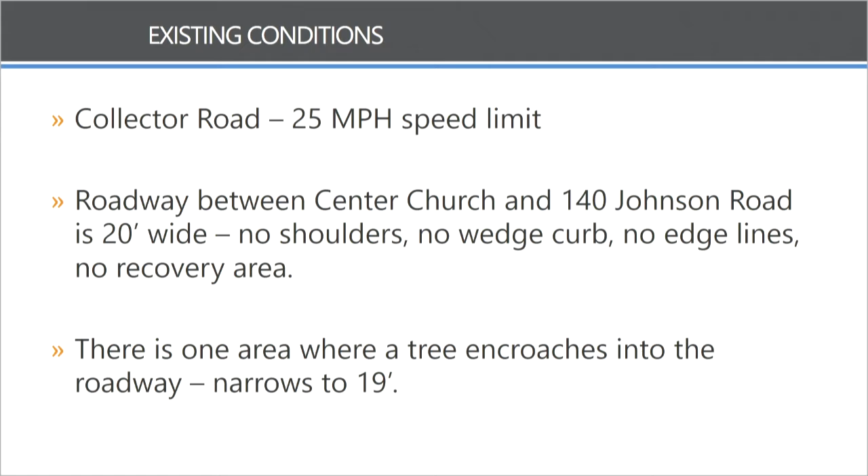Here's what we found with some traffic data we collected recently. Good news is speeds are down from when we did the traffic calming originally. We had a counter up at 114 Johnston Road. The traffic 24-hour count is 2114 vehicles a day, and the 85th percentile speed is 34 miles an hour. Down at 151 Johnston Road, the traffic count is 1532 vehicles per day, and the 85th percentile speed is 35 miles an hour.

As Paul mentioned, there were some crashes, and I was kind of surprised at the number of crashes. This is a 5-year crash history from 2017 to 2021, a total of 15 crashes. There is a cluster in the maps on the next page—I'll show you after we go through these numbers real quick. There is a cluster of those crashes here between Center Church and 140 Johnston Road, and it kind of caught my eye because I wouldn't expect to see that many in that time period in this small of an area.

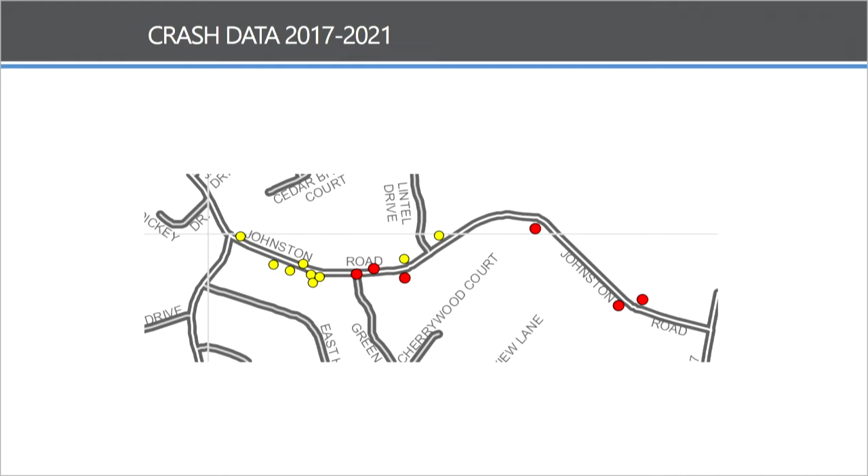You want to go ahead? So talking it over with Mr. Zamitis, we talked about some recommendations. What would we do for something like this? And Mr. Arcuri, with the traffic calming committee, we like to try to take some steps. We don't throw 30 things at once and see what happens.

Right, I thought the best approach here would be to upgrade signing and pavement markings and things like that. So there are signs out there now, there are some curve signs out there. I think the first thing to do is go out and check the reflectivity of those, and if they're even 10 years old or older, probably just replace them. They're probably beyond their useful life.

There are these slow curve pavement marking signs that PennDOT's had a lot of success with. They've had 40 to 50% reductions of crashes using this type of curve pavement marking on the road. Again, it's a pavement marking application that the township could either contract out or do themselves.

Good, Paul. Curve delineation, you can see the flexible delineator post. One thing you notice if you're up there on Johnson Road, a lot of people have their own homemade deflectors or reflectors or things they're sticking up, and some people have highlighted tape taped around some of the trees up there. There's people already doing this kind of on their own. I think it would be best if we went out and had some of the standard highway type delineators put in. Another thing, some street lighting would help coming into some of these curves.

And like I said, there are a few trees that are right up against the road that, if somebody hits them, that's going to be... Are they in the right of way? Yes, trees in the right of way. That's something me and Mr. Zamitis would have to go over, we'd have to see what things are in the right of way and really find those trees.

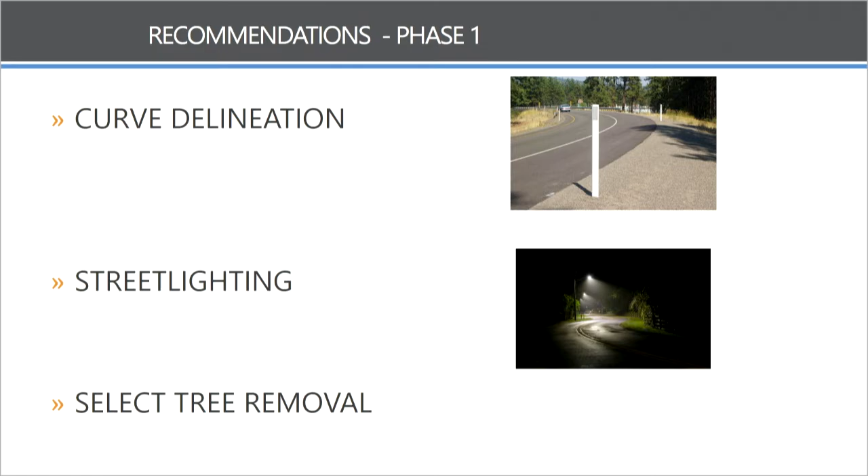There's a couple trees out there that are actually, you see some damage on them. It looks like somebody hit a couple of them. And maybe they're not getting reported to the police because, again, if you brush up against something and you can keep going, these people, they don't stop, they don't report the accident.

So it's not in the database. I would expect there are a number of crashes that we don't know about out there.

So a couple quick questions. The speed variance, 46 down to 34 miles per hour, what do you attribute the difference to? Could it be the time of year, so people were driving slower in the winter because the roads weren't good, and back in '13 it was done during the summer? Why do you think there's such a big difference in speed?

Well, I think we've done a lot with the speed display signs. There's a couple on Center Church further up, and then we have the pair down here on Johnson Road. So I do think they work. I'm surprised they're working that much, but they do work. Just to get some comparison of the numbers, I went out and measured the speed twice in those locations, on two different days.

And those accidents that are reported, do you know what percentage were during the day and what percentage were at night? It's in the data, I don't have that handy, but it's in the data. There were a number of nighttime accidents. Some of them are mailboxes getting hit - you don't know when that happened because the person wakes up, goes out, sees a mailbox knocked down, and doesn't know when it happened.

Thank you. Sure. I have a question for you, Mike. The actual road as it presently exists, is there a white berm line going down the middle, or a line down the middle or anything like that? Because I remember there was some road, I can't recall where, but this was several years ago - I thought it was up one of those roads.

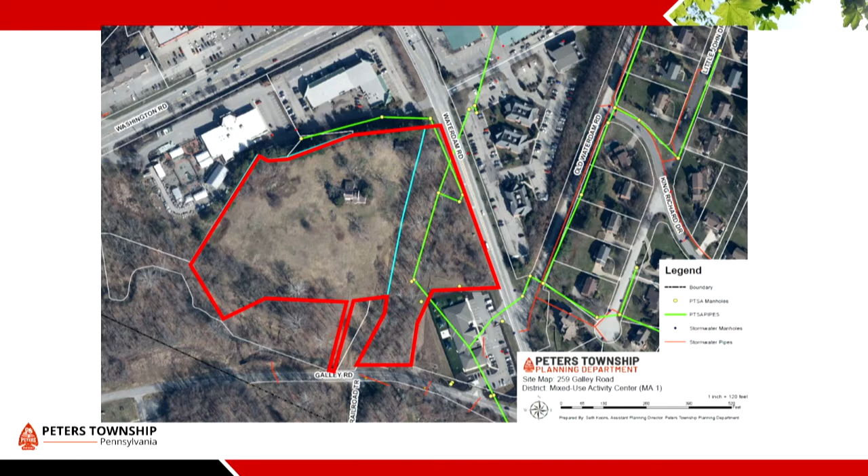It's for a proposed multifamily residential development on property located at 259 Galley Road, including a request for relief from certain township regulations. Let me begin with some background. What's being proposed on a 10-acre site bordered by Water Dam and Galley Road is a multifamily development. Because the proposed development requires changes to the zoning ordinance as well as variances, the developers asked for the opportunity to address the Planning Commission, which they've already done, and to address council prior to finalizing acquisition of the site.

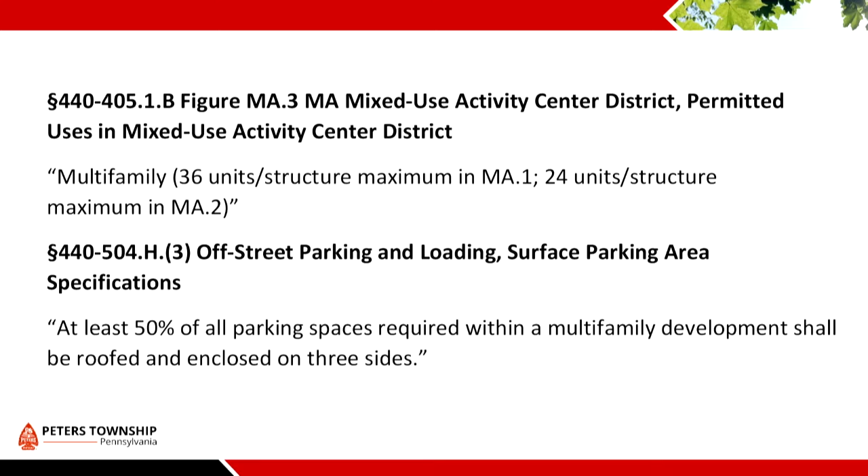So what's being requested is that the township consider changes to its zoning ordinance, removing the restriction that multifamily dwellings in this zoning district be limited to 36 units, and eliminate the requirement for covered off-street parking, which is actually a requirement in all zoning districts that have multifamily dwellings.

So what they're proposing is to be able to build something that's a much more substantial structure than that, and they can show you what they're proposing for the site.

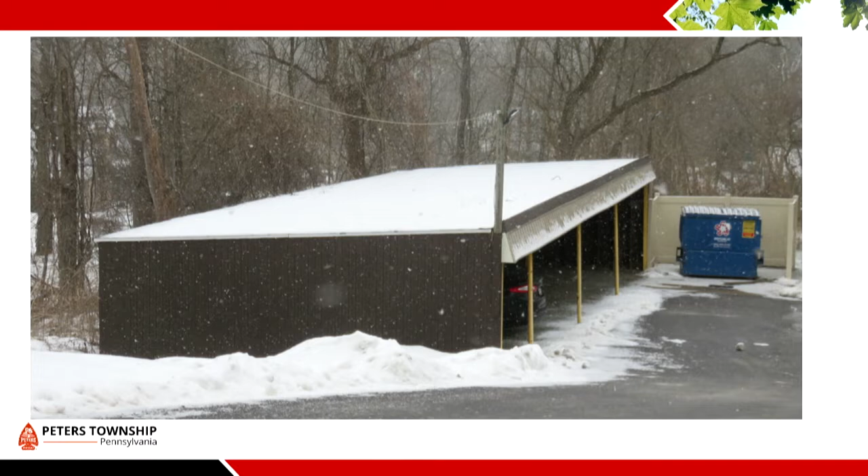The other thing is we don't have a lot of rental properties, but the few we do have require covered parking. These are examples of what that parking looks like, and this is an area where I think anybody who looks at it doesn't necessarily see it as an attractive amenity for a multifamily dwelling, except for the fact that in the wintertime your car is out of the weather.

The other thing they're requesting are 2 variances. In this zoning district, as is the case in the town center, there's a requirement that buildings actually be pulled towards the road, and the idea is to take all the parking and place it into the interior of the site.

The second part of this is that, just as there is in this zoning district, there's a requirement that if you go up to 4 stories, there be setbacks on upper elevations of the building.

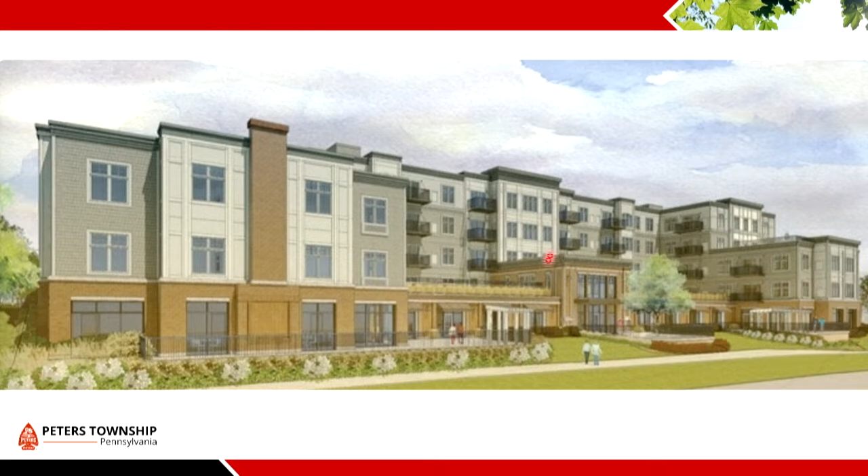So this is an architectural rendering of what the Waters looks like. When it went up to 4 stories, you had to step this section of the building back even further from the road. One of their points is that if you're granted this variance and this building now sits at least 100 feet back off the road, does it make sense to have the 4th story being set back?

That's kind of bootstrapping, Mr. Lauer. Yeah, well, the thing is, and this is beauty's in the eye of the beholder, 100 feet isn't that far off.

So how far is the Waters building off of Valleybrook Road? Maybe 30? 25, yeah. And so what I would argue is if you go across the street to Brewster's and look up at the building, now you're 100 feet away, it's still an imposing structure.

But I think the other thing this whole requirement was attempting to get to was to have buildings that have architectural relief. So if they were granted a variance for the site, I think what we'd want to see is a structure that provides architectural relief. These are renderings they've provided, and in my mind that's more than just a box. So I think you're accomplishing that same goal.

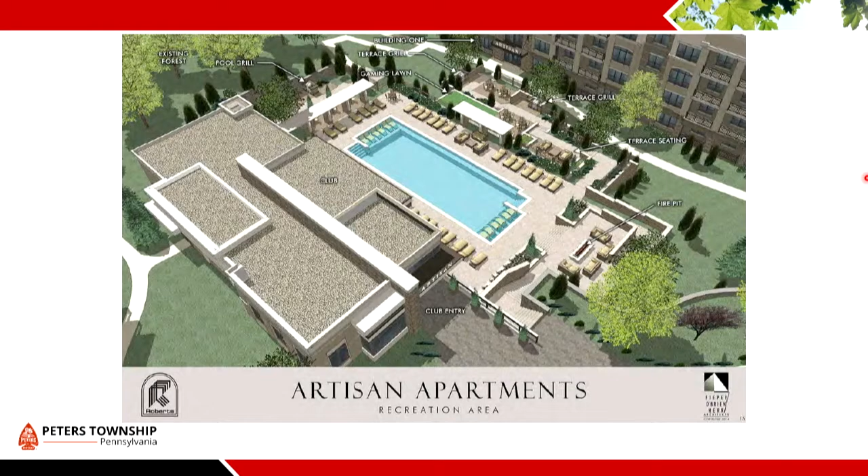I would add that we really want to deliver best-in-class development here. Looking around at contemporary Class A projects, we don't feel that we can provide the same level of amenities and quality of the end product. If we were restricted to that 36-unit max, it's really going to take away from the value, the quality, and the desirability of the project.

What do you envision these units renting for on a monthly basis? We have a pretty balanced mix of 1 and 2 bedroom units, with a smaller percentage of 3-bedroom units included. The smallest units being in the $1,200 range, with the largest units being over $2,000 a month. That's really all dictated by the market.

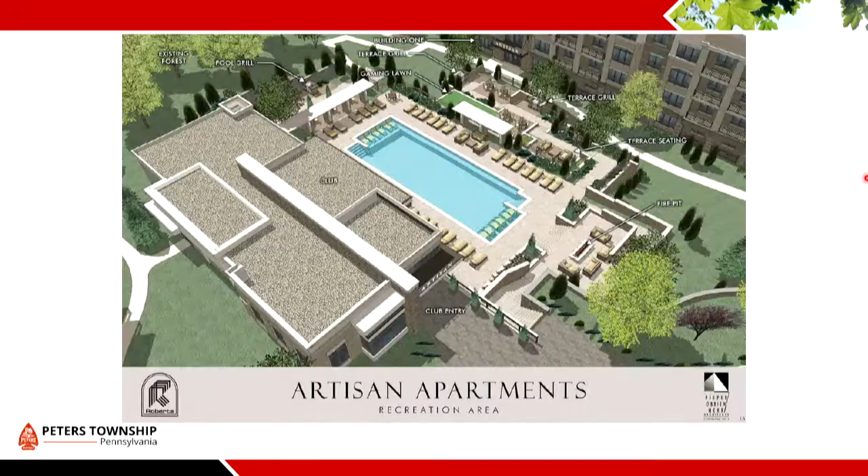I saw a pool - is there other amenities as well? Yes, so we have planned a fitness center, a tenant lounge, a dog park, the courtyard pool, a grilling station, and a barbecue area.

And this isn't the... we would plan to have smaller business centers to support remote working. These are developments that they have done elsewhere, which they have represented to us, that kind of reflect the level of the product they're trying to do.

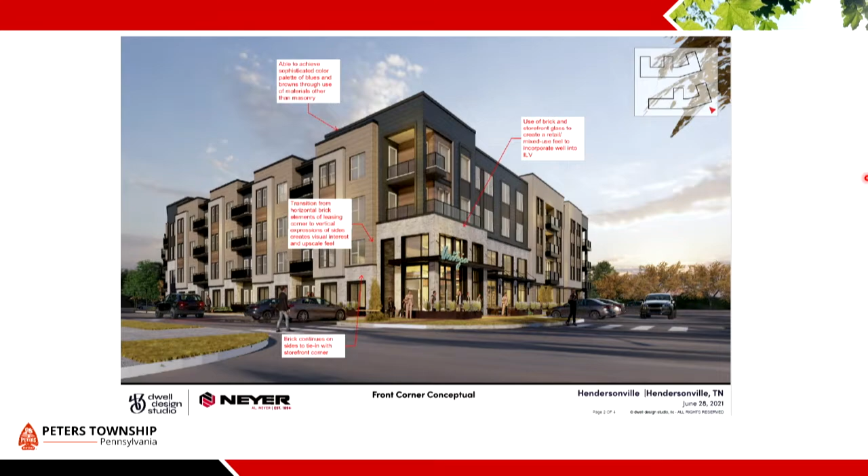Well, this is definitely a type of housing we don't have in the township, and I've always been a fan of housing diversity. I'm certainly more excited about this than the idea of putting a hotel there. I think there was one other plan that came in once - they wanted to put an office park in there, or office condos or something like that. I think it's a great use, but that's just my opinion.

One thing for sure, there is very, very limited rental opportunities in Peters Township. From a greater market perspective, we continue to see increasing demand for quality multifamily housing, and there's very low supply, especially in Peters Township. Reviewing the current housing stock and the comprehensive plan, that was identified as a guiding principle to increase housing diversity, and we're excited about this.

We think this has a ton of potential, not just from a site standpoint, but in activating that corridor at the intersection of Waterdam and Route 19. We really feel like this is going to add in a very positive way to the housing inventory in Peters and help draw in a wider range of demographics, from younger professionals who may have went away to school and want to come back into the township but don't have an option, to retirees or empty nesters looking to downsize. I think this fills a gap that really doesn't currently exist.

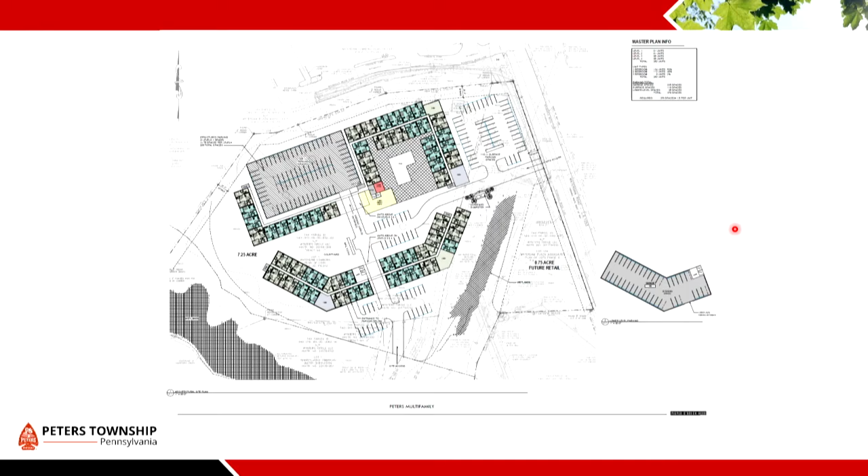Well, my first reactions are comments you probably aren't going to like. I think it's too much for the size of the parcel. It may be distorted based on the images of the developments you're using to show the type of structure, but to me it's trying to put too much on too little a lot.

My other comment is we don't necessarily have agreement as to what 4 stories is versus basement areas, and the fact that we let a building get built that had 5 floors to it - that will not happen under my watch again. But I don't think there's any question anymore because of the changes that were done to the ordinance, and the maximum height is established.

The other thing about this is that's different than this property over here. That property is relatively flat, so you don't have this large grade that causes, on the waters, the park coming down to Valleybrook Road, to have in essence 5 floors. It's a sense of mass of the elements that just visually seems to dominate.

So when you say that, do you mean confined to the site, like visibility outside of the site? Are you concerned that from the perimeter of it, it would be visible?

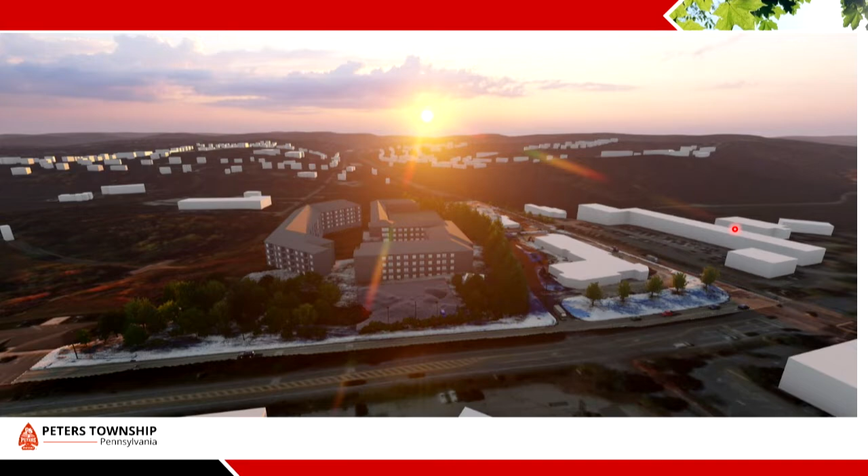Yeah. So if you want to pull that video up, you could probably skip the first 20 seconds. We did a quick 3D modeling - we flew a drone around the topography, picked it all up, and modeled the vegetation as best we could based off the species we know are in there. We're doing a drive-by to see what this site would look like if you were to plop this in place. As far as grading is concerned, we haven't done a final grading plan yet, so we approximated based off the top of existing grade.

Essentially, when we go to balance the site, the building's going to have to come down a little bit. So this is kind of a worst case scenario.

Is there a play button? Yeah, that's what I'm looking for. There we go.

What road am I supposed to be on? You're on Route 19, coming down, going north. You're going to make a right-hand turn shortly onto Waterdam Road.

And the only reason we're leaving the vehicles in there is because when we droned it, you can actually see the vehicles and drop them in so you can see that you're driving at a vehicle's height.

Right now we're making the turn. You'll see that's the Ace Hardware. We're going to be making it, just to kind of see visibility. So you should be able to see the building here, but with the existing evergreens, it provides pretty good screening for what the site's actually going to see.

We're coming up on the secondary entrance, the back entrance to the loading docks for Ace Hardware. This little portion, if you could pause - is there a pause? Okay, great, perfect. So this would basically be the limits of what our proposed screening buffer would be.

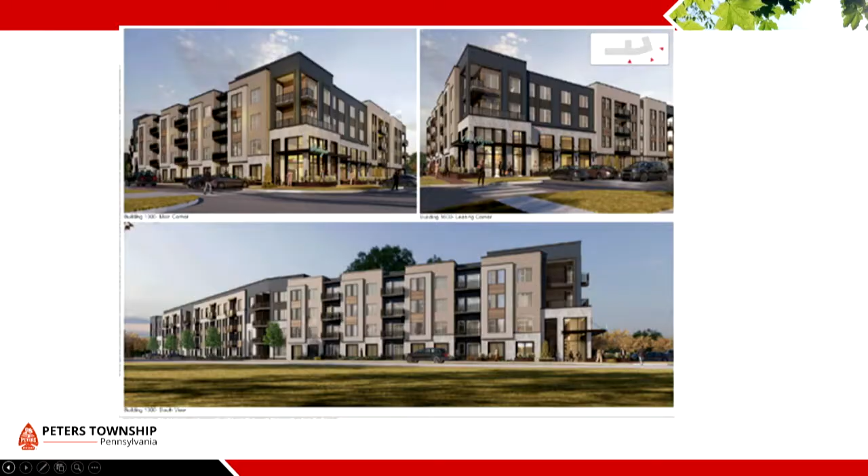So, were there other portions that you still needed to go to the zoning board with beyond what you're asking relief for council? Yes, there'll be a variance or two, possibly. I think it was the last two items we discussed. Yeah, so the 36 unit and the shelter parking are the two zoning amendments. These 4-story step back and then maximum setback that we talked about are the only other non-conforming items. Have you decided from a time standpoint, because if you don't get that relief, do you even have to go through this process with this board and amend our ordinance?

If you go there first? Right. In order of priority, they're all important, but the 36 unit maximum really would make this a development that we wouldn't be interested in. And so we really would like to know where we stand with that sooner rather than later, before we advance our pre-development and pre-construction activities and advanced design.

Yeah, I get that. I'm just wondering from a timing standpoint, you could probably get before zoning faster than this board will take action to repeal an ordinance and change it with the public hearings we'd have to have, don't you think? I think so. Yeah, we could talk about the timing of all that. I think to this point, we wanted to solicit the input of the Planning Commission and Council, see where we stand, and we do think we need to map out next steps. Yeah, that's your prerogative as to how you proceed. I just throw that out there because if you ultimately would fail at that board and we change the ordinance for no reason.

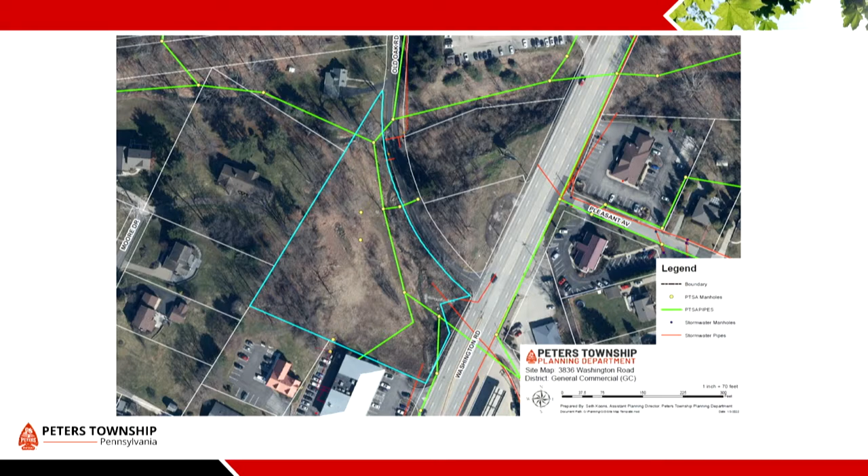It was the same parcel, and at that time council tabled this and said he needed to go back and have a traffic study done, particularly regarding the impact of this development through cut-through traffic that might come down onto Old Oak. That's been done, and I think everybody's convinced that's not going to be a problem—that people aren't going to use this somehow to bypass the traffic light at the crossroads.

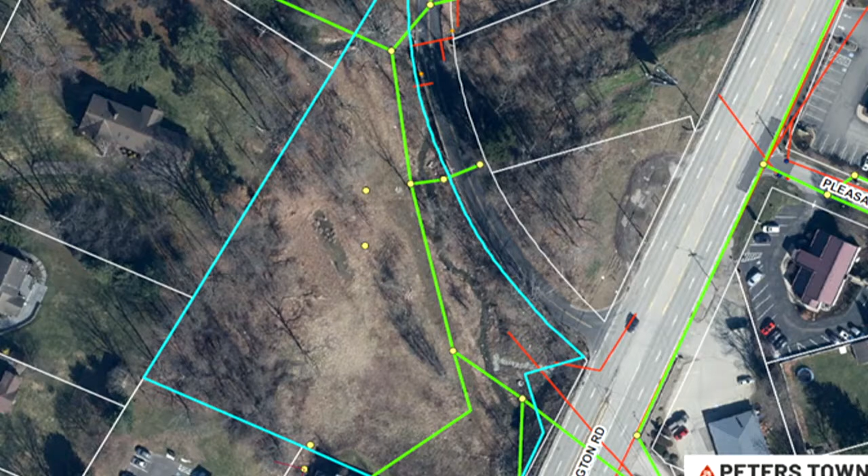He's back asking the same request for consideration of a wall that exceeds the height stipulated in our ordinance. Our ordinance requires walls be only 6 feet tall, then you can step them back 3 feet and go up 6 feet again. You can't do that on this property because of all the topographic challenges—there's a creek at the bottom, there's a floodway, it's a very tight piece of property. So at maximum height, the wall being proposed is 23 feet.

I said this back then—I didn't have a problem with it because I don't see how else you're going to develop this parcel, quite honestly. The other alternative is we leave it empty like the parcel next door and someone sticks a billboard on it.

So is it the parcel to the left? Like if you're going up 19 and make that left-hand turn, is that where the billboard is? Right next to the billboard, across Old Oak from it. No, look at what Chipotle and MedExpress are—the next parcel over to the right, before you get to Old Oak Road. Before Volkswagen? Yeah, you can do something there. Hypothetically, a wall, yes. Wow. Do we know what they're planning to do there? That's what the wall is for. I'd assume it's going to be something like what's already up there.

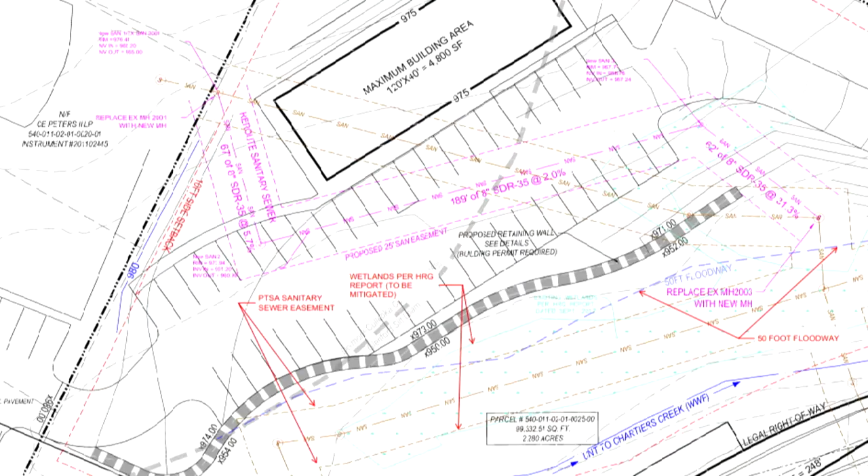So the only time you're actually going to be staring at a 23-foot wall is if you're coming in off of Old Oak as you're climbing up from 19. You're really not even going to see it from 19, quite honestly, because it's going to be pretty much mostly below road level. So you're not proposing to build it up, you're going to drop down and then be down, okay. Correct.

But again, anybody driving up Old Oak is going to see this wall. How far is that from the residential property right back in there? Is it far enough away? There's a stream in between, if you could pan out just a tad.

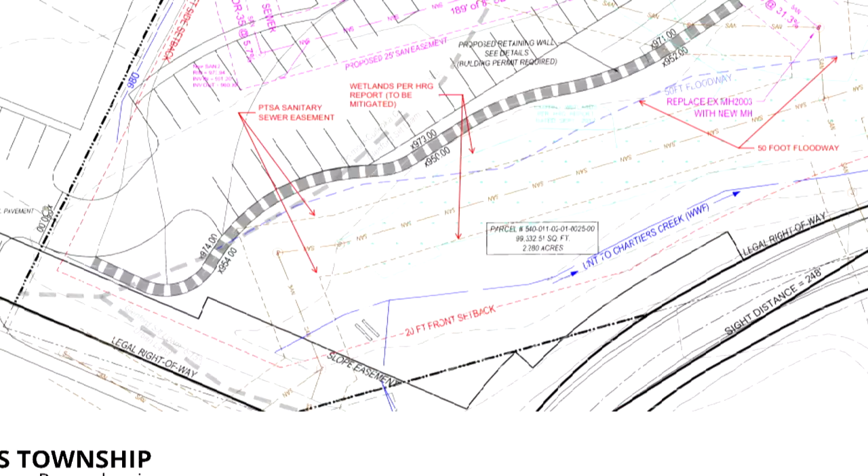Use the other map. There's a stream to the extreme right, where you see the marker, there's a house there across the stream.

Yes, and wasn't that the individual who showed up at the planning commission? Well, it didn't actually show up at the meeting, they sent an email in. That was considered the plan.

So 19 down at the bottom, right? Okay, yeah, we're not sure if he puts this in, he'll be able to connect to the adjoining shopping center.

There is a cross-access joint agreement between property owners to shared driveway access. And I would point out to you that our ordinance requires that all commercial properties along Route 19 interconnect so that people can get out of traffic.

Is there going to be direct access to Old Oak from this parcel? Yes, correct. Do you envision any problems with that? There was a problem with that, the way we had shown it two years ago.

Working with Mr. Mudry, we've gotten the sight distance that was required, because that's a weird curve there. Yes, we shot the sight distance, we had to trim branches. So we ended up having to shift the entrance down about 50 feet from where it used to be. So what you're seeing now complies with the traffic requirements.

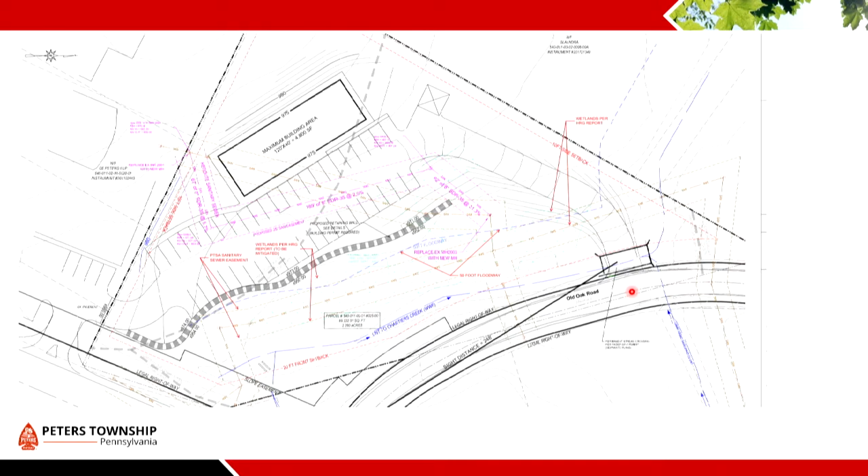Mark, one of the concerns - I'm not in favor of the higher wall. I don't envision too many people coming up West McMurray Road making a right, because you can just go out. You're going to cause problems for Med Express. Maybe that's where that marijuana dispensary can go.

What's that? That's my place. Well, what I wanted to say was, I heard that.

I've been opposed to higher walls throughout my term here on council, and the caution I'm going to have, because I'm sensing that this development might take place, is that we would not allow the building to be constructed immediately behind the wall, to avoid the foundation problems that existed down in Little Washington.

That's correct. The way they're laying this site out, the building itself would be on virgin ground. They cut way in the back corner of it. The building is on virgin ground, and it doesn't get to a fill condition until you get out close to the wall.

But that would have to be a condition that I think would be implicit in whatever action we take. Oh, you could make that a condition. Yes. In fact, that would make sense, if you're concerned about that - you would want to include that in the conditions.

So, what was your comment, Mr. Lewis? Well, that the siting of the building would have to be on native ground or virgin ground, as Mark said. Okay, I'm going to make a motion that we approve the request for the departure of regulations regarding the wall height for this property, and make it a condition of any further development that any building and parking area be built on virgin ground.

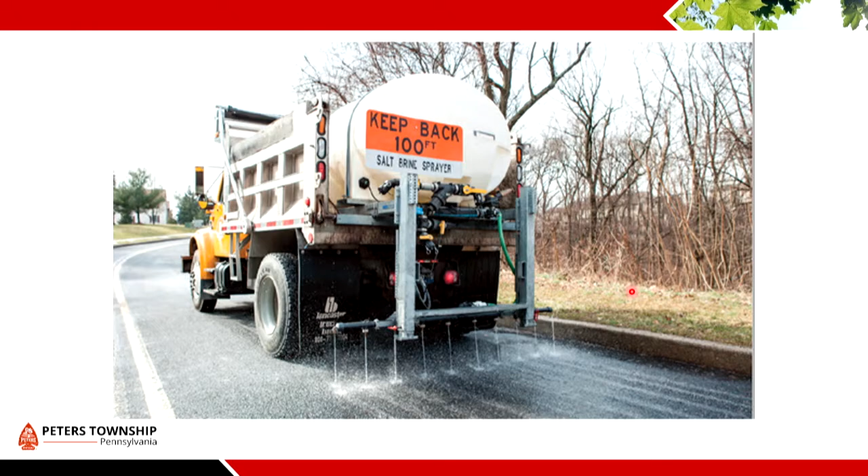Item D, award of a bid to purchase 2 truck-mounted brine dispensing systems. The 2022 budget includes an appropriation of $60,000 to acquire 2 truck-mounted brine dispensing systems. These are used to treat roads in the winter to mitigate icy conditions. One will replace an existing truck-mounted system acquired in 2007. The second is an additional unit to increase our capacity. These are being purchased under the COSTARS Cooperative Purchasing Program, and Stephenson Equipment has provided a quote of $28,077 per system. If we order these, we may have them in time for next winter.

It's within budget, correct? Yes, it is. I'll make a motion that we purchase the brine dispensing systems. Second. Okay, moved and seconded. Any other comments from council? I'd only like to say that I've been more than satisfied with the effort of what that accomplishes. I like it when I come out and I see it's already been sprayed on the night before. All right, all those in favor, please say aye. Aye. Opposed? Okay, carries 7-0.

Item E, resolution electing the standard allowance for revenue loss as provided for under the final rule governing the Coronavirus State and Local Fiscal Recovery Funds, part of the American Rescue Plan. As I had explained previously, this allows us maximum flexibility to expend those additional funds. It's my recommendation that the council elect to adopt the standard allowance by adopting resolution 2122. So moved. Second. All those in favor, please say aye. Aye. Opposed? Okay, carries 7-0.

Item F, resolution authorizing the destruction of records. Move we approve Resolution 02-02-22 authorizing the destruction of municipal records in accordance with the Municipal Records Manual issued by the Pennsylvania Historical and Museum Commission. Thank you. Okay, all in favor, please say aye. Aye. Opposed? You should be an auctioneer.

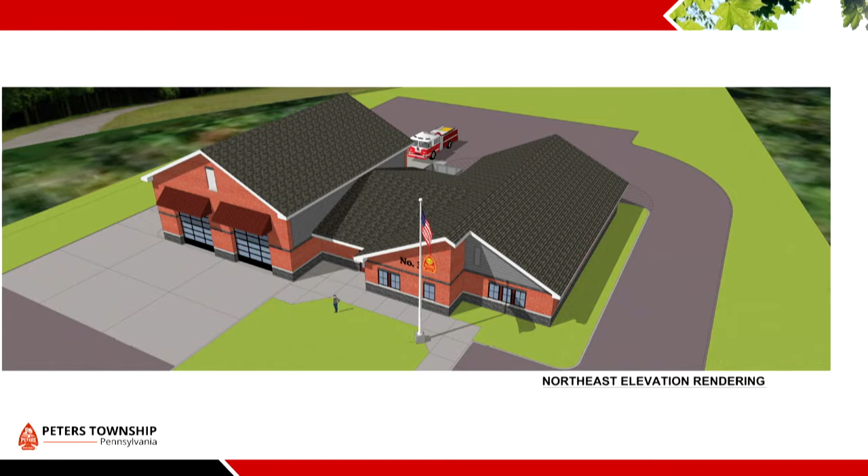The fire station's going to require borrowing funds to finance its construction. The first step in that process is for the township to employ the services of an independent municipal financial advisor to help us make decisions on how to structure that bond to the best benefit of the township. Janney Montgomery Scott has served in this capacity in 2016, 2019, and 2021, and particularly since they are so familiar, given the most recent bond issue, it makes sense to use them.

They not only help us in terms of structuring this, they will also help us through the process of obtaining bond counsel and paying agent. But since we've been out to bid on those services so recently, at some future date we're probably going to suggest appointing the same people.

Thank you. All right, I'll make a motion that council authorize the appropriate township official to execute a municipal advisor services agreement with Janney Montgomery Scott. Second. Okay, motion's been made and seconded.

Any other concerns? The only thing is, has that been reviewed by the solicitor? I've not seen it, although Paul typically doesn't send that over. I was going to say, but I can send it over before we execute it. Do you mind if we just have him review that, Frank? Can you add that to your motion? That's not a problem.

All right, thank you. Anything else from council? I will be abstaining. Okay. All those in favor, please say aye. Aye. Opposed? One abstention. 6-0-1.